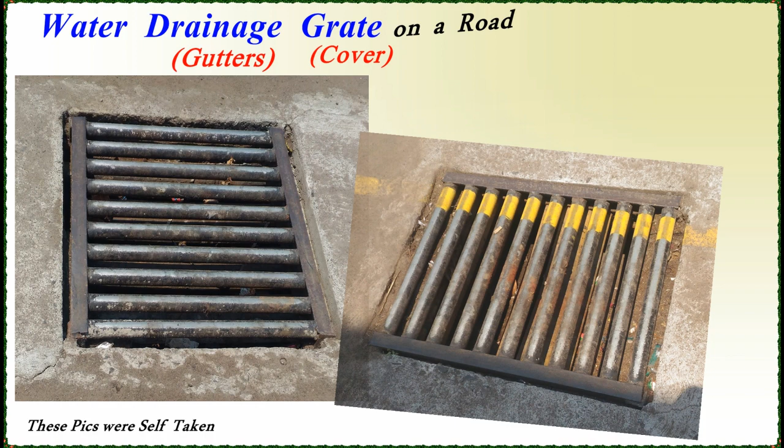This is a water drainage grate or gutter cover which you could see typically on a road. Overall measurements and material of construction. Steel structural members: L angle 1.5 inch by 1.5 inch, 2 numbers; pipes 1.25 inch dia, 10 numbers; all welded together. Pre-visualizing the final design.

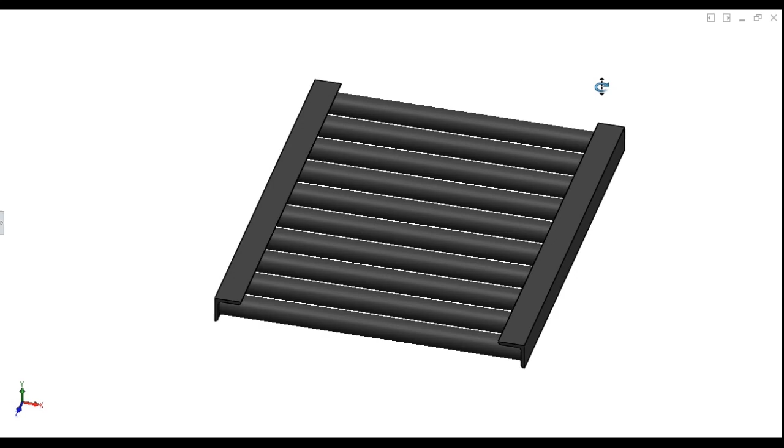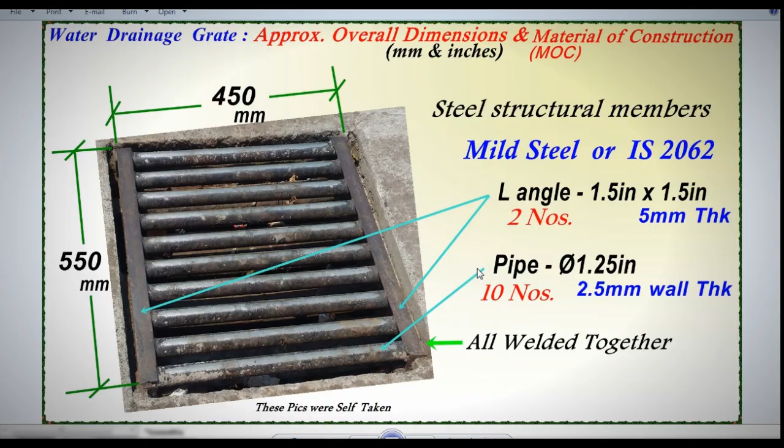Let's begin. 550 by 450 overall sizes. First, I would draw the skeleton sketch with these dimensions. So, sketch done. Let's make these 1.5 inch by 1.5 inch L angles.

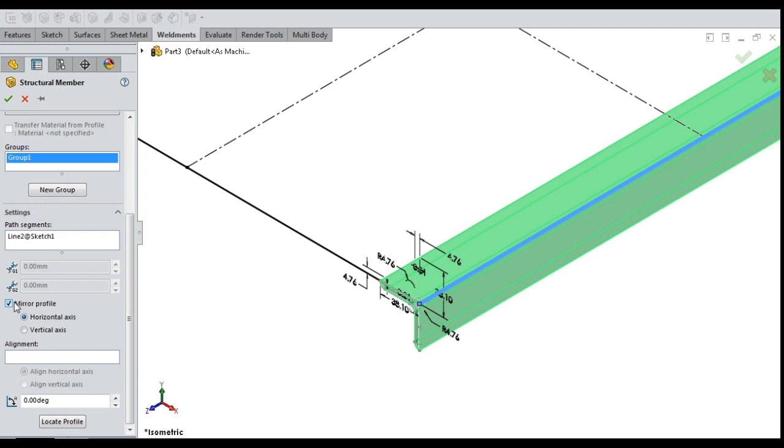Activated the structural member, choosing standard, type and specific size, positioning the L angle and orienting it. Similarly, positioning the same size L angle on the other side.

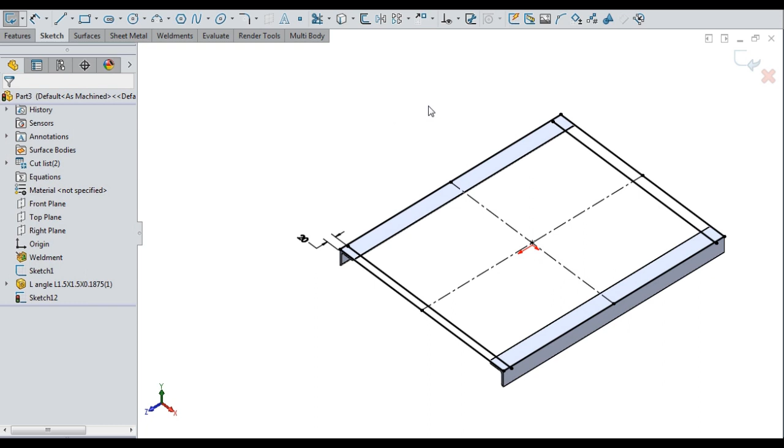1.25 inch dia pipe. Let's draw the line to position this pipe. Line is placed 20 mm from the front. Then duplicated the line to the other end. Let's make the dia 1.25 inch pipe.

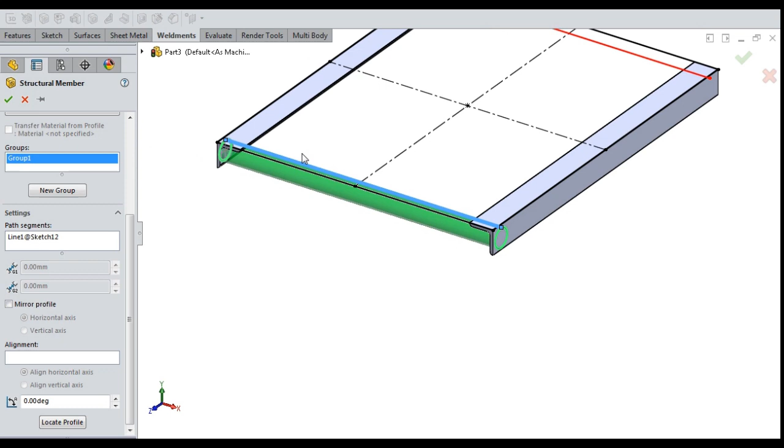Invoked the structural member, choosing pipe standard and its size, and positioning the pipe properly. The pipe is protruding through both the L angles. So let's trim this pipe on both sides to match exactly to the L angles.

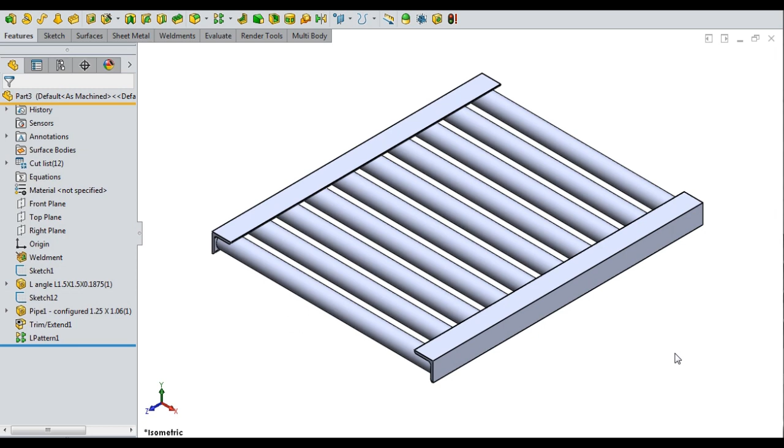Totally there are 10 numbers of pipes in this grate. Let's duplicate this pipe 1 to 10 numbers by maintaining the mathematical intelligence. Pipe center to center distance is 56.6. The mathematical intelligence here is, if I add this value to the total length, the number of pipes increases accordingly.